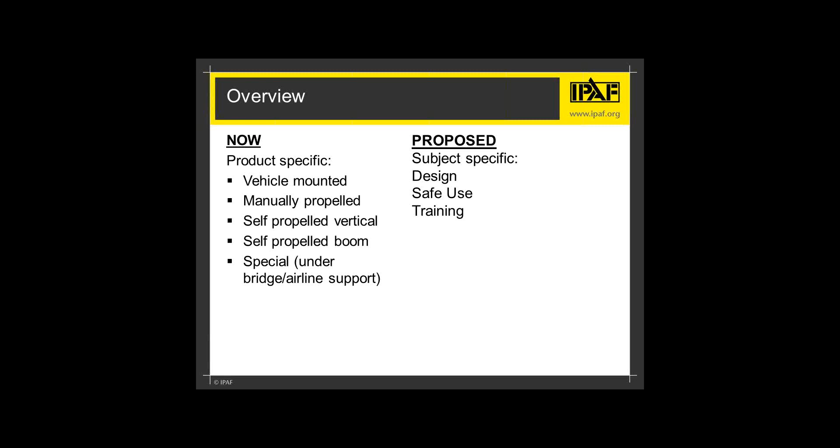The International Organization for Standardization, or ISO, is an independent, non-governmental membership organization and the world's largest developer of voluntary international standards. Members of the national standard bodies, such as ANSI and CSA, are part of 163 member countries around the world who participate in the development of the standards.

International standards make things work. They give world-class specifications for products, services, systems, and ensure that the quality and safety and efficiency of those products are in place. They're instrumental in facilitating quality. For businesses, they're strategic tools that reduce costs by minimizing waste and errors and increase productivity. They help companies to access new markets, level the playing field for developing countries, and facilitate free and fair global trade.

It's important to know that both ANSI and CSA are part of the development of ISO standards and are the voting member for their countries. Each country gets one vote. So while ANSI and CSA are part of the ISO standard development, there are different needs or focuses in different countries and the potential difference of opinions on what is finally approved. So as a result, the full adoption of the ISO standards is not common, as there's a need to modify or change the standards to meet the individual country requirements.

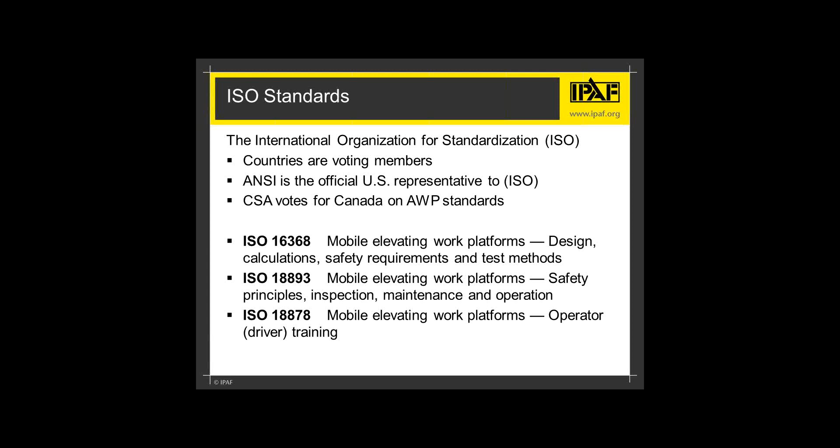The proposed standards being developed will follow the ISO structure with design, safe use, and training, and will cover all types of aerial work platforms. The same standard structure will be used by CSA in the development of new mast climbing work platform standards and the development of new proposed standards for transport platforms. So in CSA in Canada, you'll have a design, safe use, and training standard for aerials, mast climbers, and transport platforms.

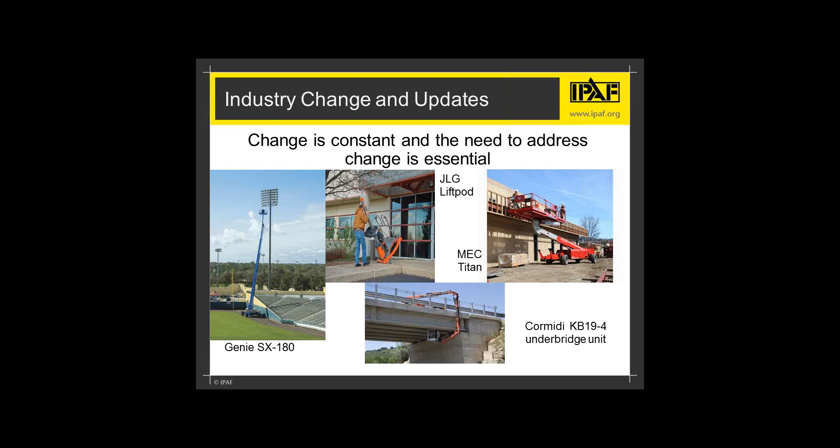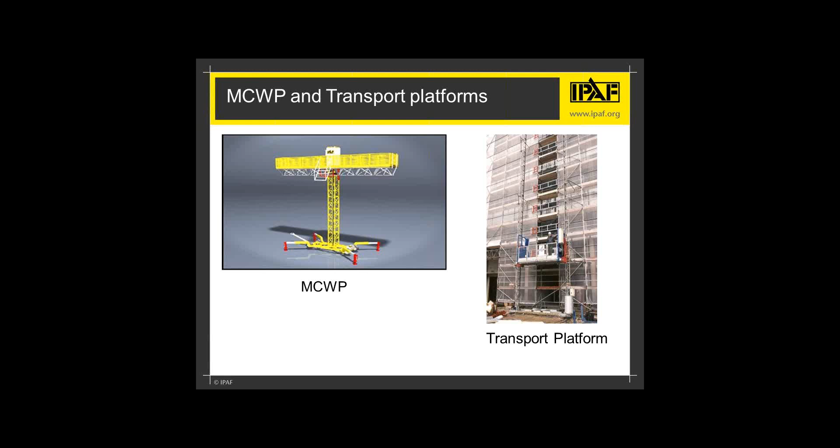When new products are developed, the industry is capable of developing standards long before regulatory bodies such as OSHA can address industry needs. So while regulations like OSHA are law, they do not change timely or keep pace with industry change. Mast climbers have been in the U.S. market since the mid-1980s, but they are still not addressed either in U.S. or in Canadian regulations. The new transport platforms are the same way, and trying to apply current regulations is truly not effective. Industry standards lead the way, and standards are the tool to assist all industry stakeholders in meeting their responsibilities and ensuring safe and effective use.

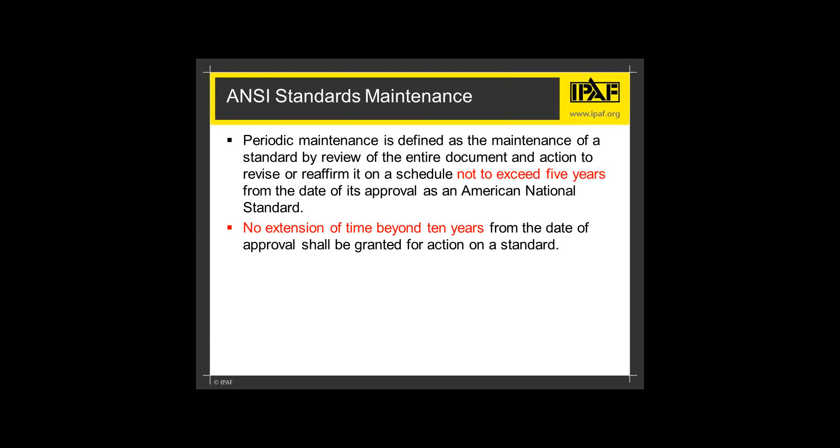So again, why are we doing this change? Well, change is constant, so there's a natural need to review and update our standards. Specifically with ANSI, they have defined very specific guidelines on how often approved standards must be maintained. Recently, some A92 standards were reaffirmed after 5 years from the initial publication, A92.3, .5, and .6, meaning they're reissued without any change. So there's a requirement that they must be reviewed every 5 years and not extend beyond 10 years before any changes are made. So it's a mandate in development of standards and maintenance.

So today we're talking about what's going on, what changes are being made. Under development today, this is a list of the A92 and CSA B354 standards under development. And today I'm going to focus primarily on the AWP standards and proposed language already released by the CSA B354 standards that were released for public comment. I need to restate that even the CSA standards being discussed today are not final. They are still out there with public comments that need to have final review by the main committee before they're ready for any level of final approval.

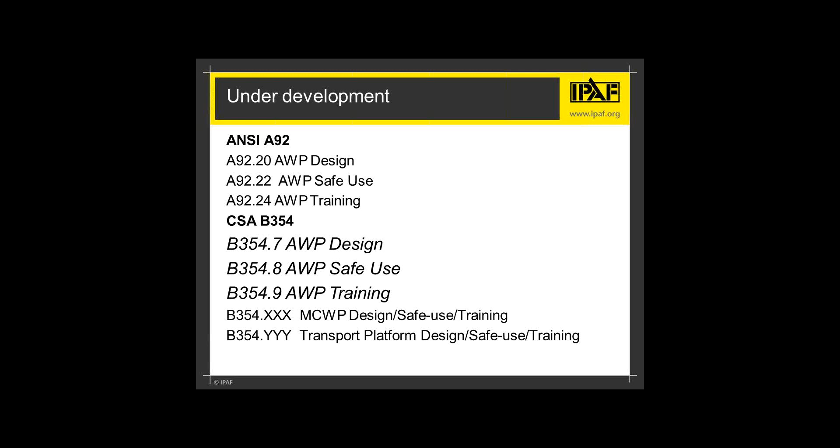Starting with the design standard, B354 standards. Both ANSI A92 and B354 main committees have agreed to use the ISO standards as the basis for these new standards for all aerial work platforms, so there's consistency on how we manufacture them, how we train on them, and how we use them safely.

There are 3 standards that will address it: design, safe use, and training for all aerial work platforms. And while it is the intent of ISO standards, both the U.S. and Canada will still have separate standards covering vehicle mounted. This may change in the future, but this product class will not be included in the new standards.

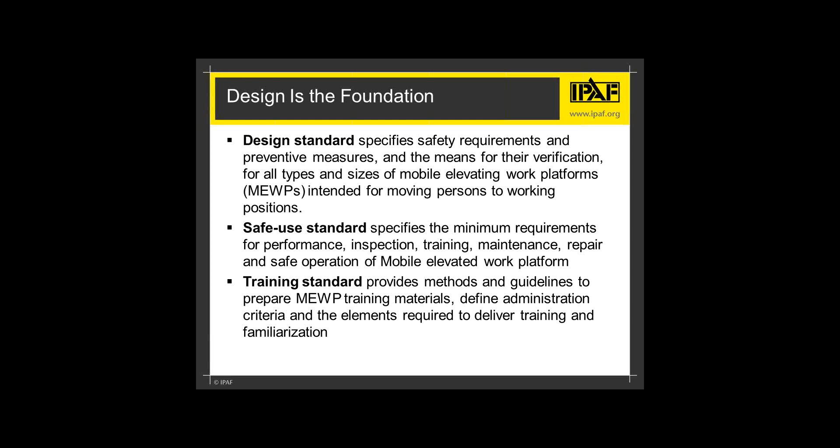The design standard actually leads the way for all of our standards, with both safe use and training addressing the needs defined by the standards. So you design the product, and then you define how you safely use them, and then how you train on how to use them safely. So the design standard is really the foundation.

The new design standards will provide more detailed requirements. There will be many more calculations required by the standard than before. As most manufacturers produce products for many countries, the adoption of the language in the ISO standards will not be new. They'll likely be producing equipment that follows most of the things that are being proposed in some part of the world. But there are some changes that they will have to make, some changes that may provide more flexibility in design for new products and, in the end, impact users.

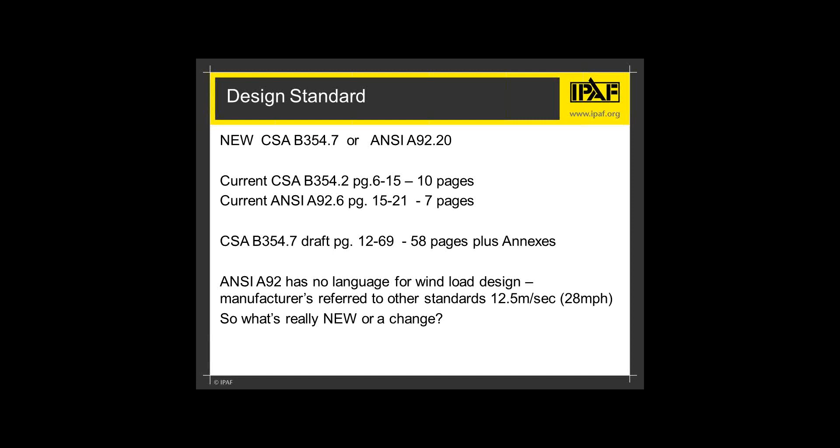So the question that I'm sure all of you want to hear about today is, what are those changes and how are they going to affect me? So again, looking at this slide, you can see that we're going from 7 pages, 10 pages, up to 58 pages plus annexes. So you know that there is more language that's in there. How is it going to impact me?

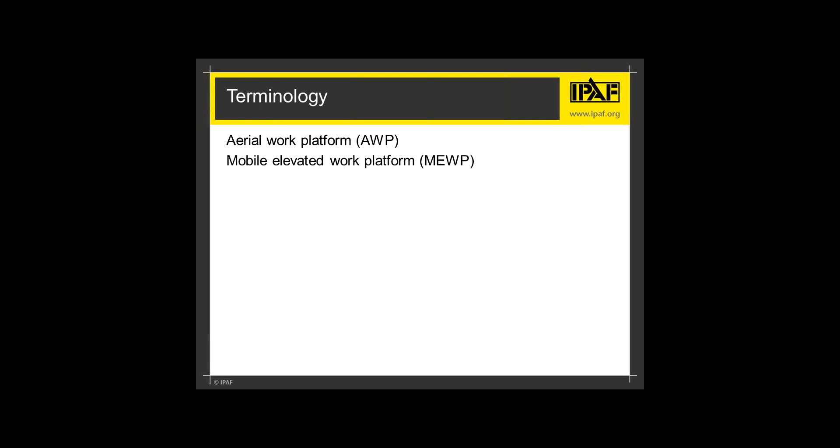Well, the first subtle change, and maybe insignificant to most, the standards will introduce by their title and referenced throughout the standard the internationally termed Mobile Elevated Work Platform with the acronym MEWP, which everyone pronounces MEWP. Having standardized terminology is important in documentation and communication. Begin to look for this in incoming communications: Mobile Elevated Work Platforms and the term MEWP.

Beyond that, a more significant change is the definition of the different types or groups of MEWPs. Again, get used to that term, Mobile Elevated Work Platforms, what you normally call AWPs today. Today's standards do not use the term scissor lift, as these pictures will hopefully explain why not. All are covered by today's self-propelled elevating work platform standard, either A92.6 or CSA B354.2. Many people may want to use the term scissor lift, but it's never used in any of our current standards.

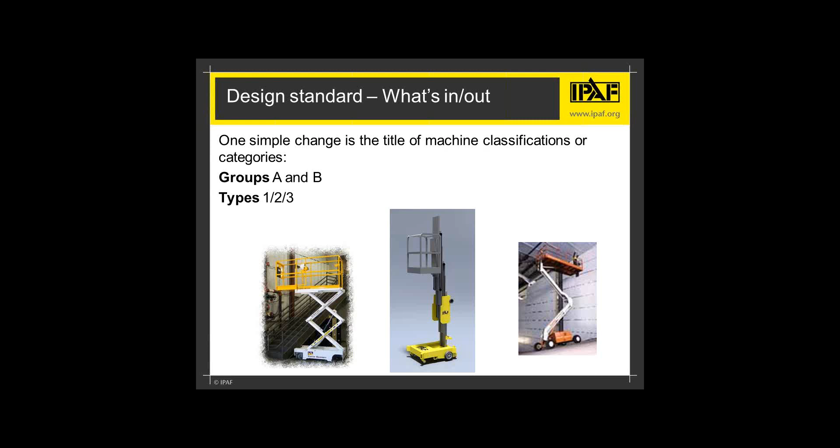So as we move away from product-specific standards, such as A92.6 or CSA B354.2, how are we going to classify the different types of MEWPs? There's that term again. How are we going to differentiate these different types of classifications as we move forward? And it was agreed by both ANSI and CSA to adopt the international definitions of MEWPs, groups A and B, types 1, 2, and 3. Well, groups A and B, and again, these are definitions.

Group A is any aerial work platform where the platform does not extend beyond the center of the work platform area and is always inside the tipping lines. And Group B, simply put, is any MEWP that's not in Group A. As you get used to these, you'll end up looking at these and saying, Group B are boom-type lifts, and Group A is anything that's not a boom. So that's where the platform will extend beyond the center of the platform area or outside the tipping zone of the chassis.

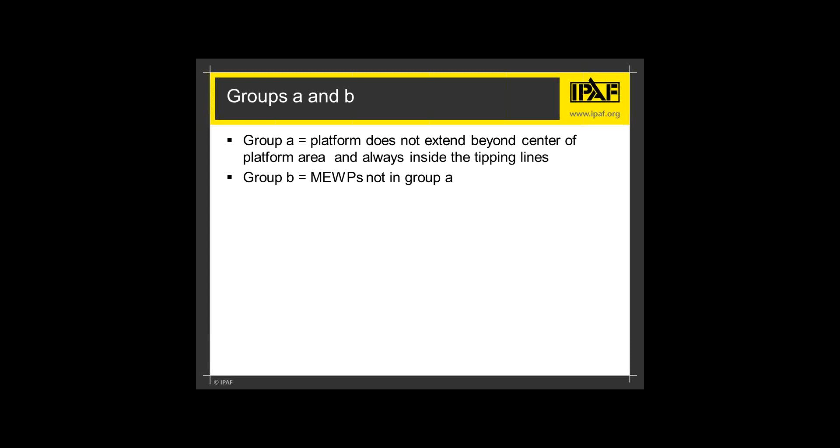So more specifically looking at these, Type 1 machines generally require outriggers to be in place prior to elevation. They're not drivable, or at least not drivable when the platform is going to be elevated. So Group A, again, is platforms that do not extend beyond the center point of the area and are always inside the tipping lines. Group B, MEWPs not in Group A.

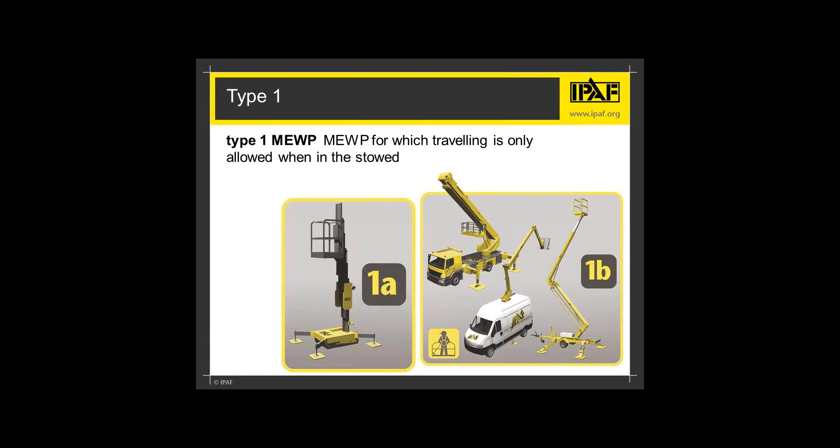So here you're looking at it, we have Type 1, which is in Group A, and Type 1, which is in Group B. So you can see the Group B are boom-type lifts, Group A are vertical-type lifts, and the Type 1 are machines that are not going to be drivable when the platform goes in the air.

Type 3 are MEWPs for which traveling with the work platform in the elevated position is controlled from the point of work platform relating to traveling. So here, when you're looking at the self-propelled machines, they are really what's going to be a type 3. And again, when you're looking at group A, vertical lifts, group B, boom type lifts.

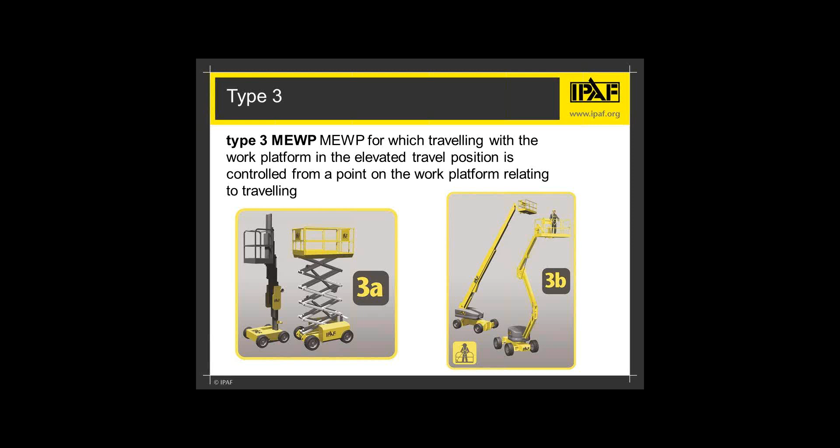So these new nomenclature or definitions that we'll be using are things that you're going to have to become accustomed to, because we're not calling them by standards boom lifts, scissor lifts, and we haven't done that in the past. So now we're coming up with, again, standardized terminology and definitions to be used in all countries.

Further changes within the design standard is a shift to more calculations. Let me start with the fact that I'm not a manufacturer or design engineer, but I am a sitting member on the design standard committee, and I understand this change to be significant enough to discuss. You can clearly see through all the additional pages that are going to be issued in the new design standard that there are changes. And it really comes to be predominantly that there are much more detailed calculations to account for most of the additional requirements.

This change in design based on testing with safety factors, such as the rated load plus 1.333, versus design based on more calculations, removes that safety factor and replaces it with calculations for all the variables. And they're compounded. So now there's a specific calculation for wind load, for stability, and all of these have very detailed calculations.

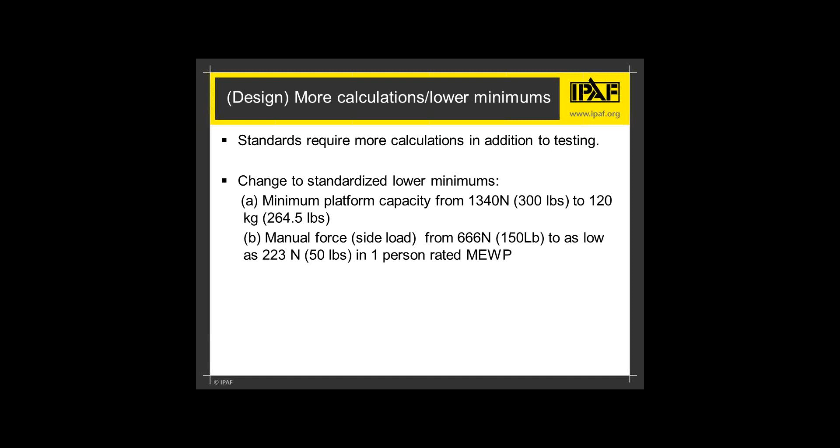Another change that's out there, it may be terminology differences, but it really is based on our standards. If today a user was asked, what is the rated slope on the lift that I'm using, most likely they'll answer incorrectly. It actually is 0, the rated slope on most aerials out in the marketplace today. When you look at the decal plate on most aerial work platforms and look at the rated slope, it'll say that it's 0. And most people think that it's greater than that.

And that's because the design standards today require that the slope warning device is activated at 5 degrees over the rated slope. So think about it in those terms: if we had a rated slope of 5 degrees and then the warning went off after that, you end up having a stability issue. So based on what the standards currently require, we end up having a rated slope of 0. And for most people using this, that probably doesn't make a lot of sense.

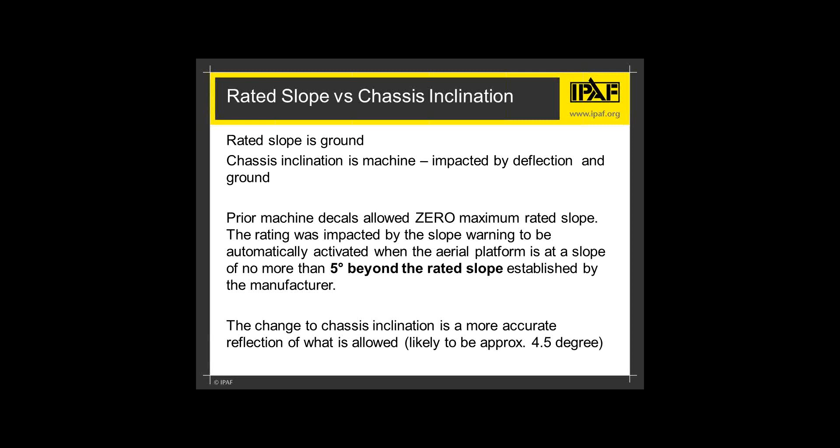So really we're making a change to chassis inclination, which is actually even more accurate, because chassis inclination takes into effect the rated slope of the ground that you can ride on, plus the deflection of the machine. So if you take a boom type lift specifically and rotate it off to the side, just the tires and movement that you have on there will impact it. So most likely you're going to find that we're going to go from 5 degrees to 4.5 degrees.

Further on in the standards, and this really goes across all 3 of the new standards, users must ensure that the MEWP has an annual inspection prior to use. Now, how do they know it if they don't own the machine and haven't performed the inspection themselves? Like an inspection decal on every motor vehicle, an annual inspection decal can provide the assurance that a qualified person performed the task. While today some rental companies may be doing this, not all do, and not all owned machines are marked. This new language defines a standard for the decal design with the required information on it, the size of it, and the general location where it will be placed.

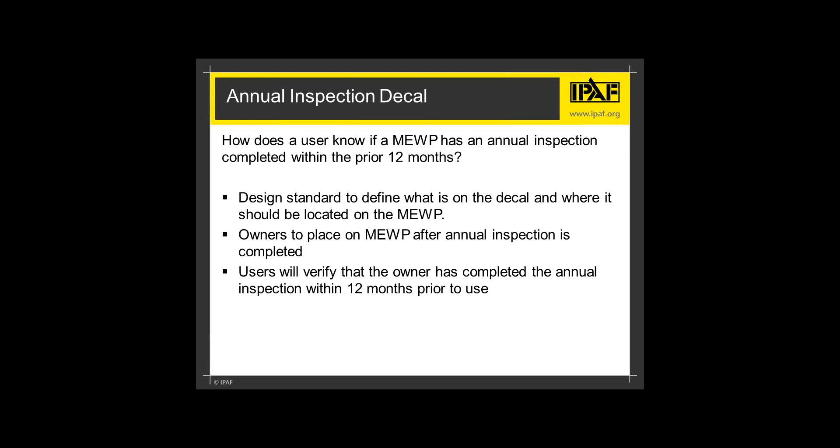So the design standard will create a sample decal that's to be used. The safe use standard will define the requirement to perform the inspections and place the decal on the MEWP. And the training standard will define the responsibility of users and operators to verify that the MEWP's annual inspection is up to date by verifying the decal. So we now have a very systemic approach to how that's done.

Probably one of the more drastic changes that most people will perceive in the new design standard is the implementation of load sensing that will be introduced on all MEWPs. Again, mobile elevated work platforms, not AWPs, MEWPs. It is a safety device that is currently on MEWPs in other countries. It prevents operational control until an overload condition is corrected.

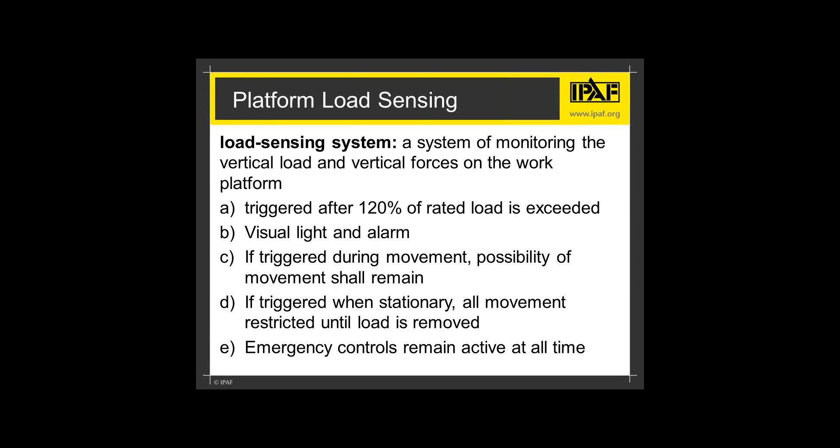So it's really not new to the industry. It's been available for many, many years in the marketplace. It's been on most aerials in Europe for several years, and it's really an added safety feature on the machines. It requires additional training and maintenance, and all of those parts need to be implemented throughout the design, safe use, and training standards. So a little bit more on load sensing as a value proposition. Well, what is it? The fundamental reason for this is a safety device to prevent overloading. And the initial complaint will be heard from those who overload the platform.

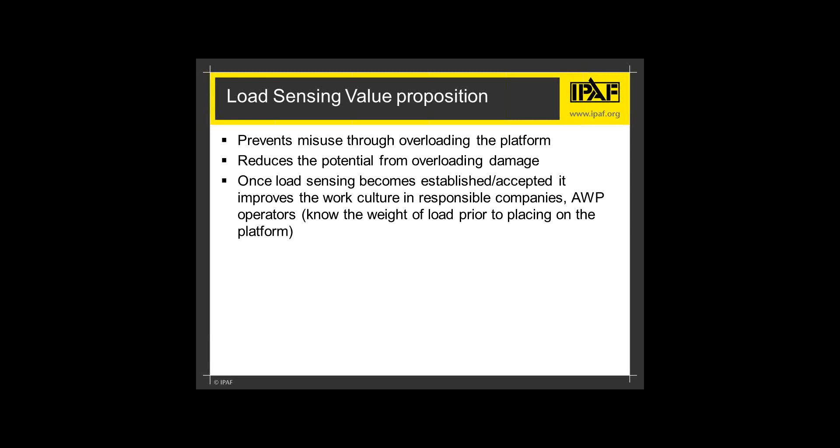So if we look at some historical information and feedback on the implementation of load sensing, look at the first one. Load sensing restricts or limits the use of the machine, especially booms or smaller capacity platforms, and this will result in dissatisfied users. Oh, I did this before, and now I can't do it anymore. Well, that means you were overloading the platform before and you want to continue doing it, because the only thing load sensing is doing is saying, here's the rated capacity and you can't exceed this.

Users request older machines without load sensing so they can continue to do what they've done before, overloading the machine and exceeding the load capacity. So again, this is some of the feedback that we've gotten historically. Customers can adjust or tamper with the less sophisticated load sensing devices. Well, obviously, this is misuse. No safety device should ever be touched. It will increase the risk of injury.

And typically, this is something that steel erectors or people who are putting heavier loads on the machine will have a tendency to do. Again, not anything you should adjust on any machine at any time. Incorrect securing during transport.

Tying down the basket of a boom can really impact that; you can end up having this load be imposed on this machine during transport. And if it's set off, then you can't move the machine when it's out there. Again, the loads need to be secured properly. The manufacturer will tell you how to secure the aerial work platforms during transport. So all these things are going to be implementation items that you need to be aware of.

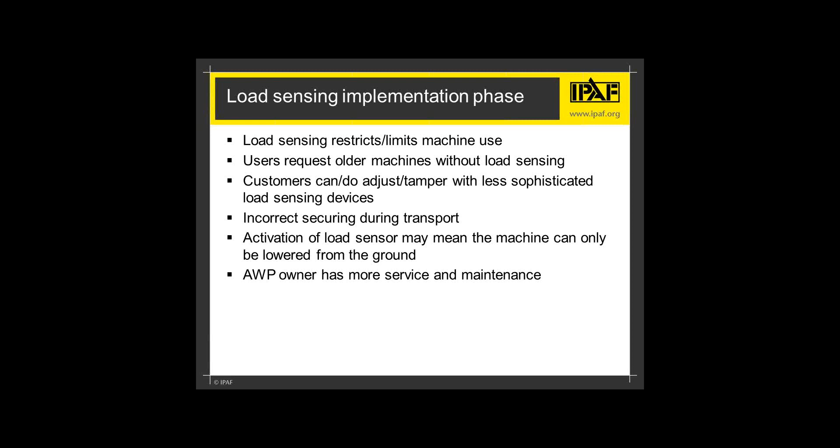But again, the fundamental process of looking at this is load sensing is a safety device, and really it's there to protect the users of the equipment, the machine itself. So that will be one of the changes that you'll see, and again, it's language that's proposed in both A92 and B354.

In the safe use standards, we have some changes that are coming about. The most current language only allows variation in use with the prior written permission of manufacturers. That's generally terminology that goes in most places throughout the standard. And users have complained that they have performed some tasks safely, maybe even more safely than other available options, but they can't get manufacturers' approval in the timeline that they need. Additionally, some manufacturers are no longer in business.

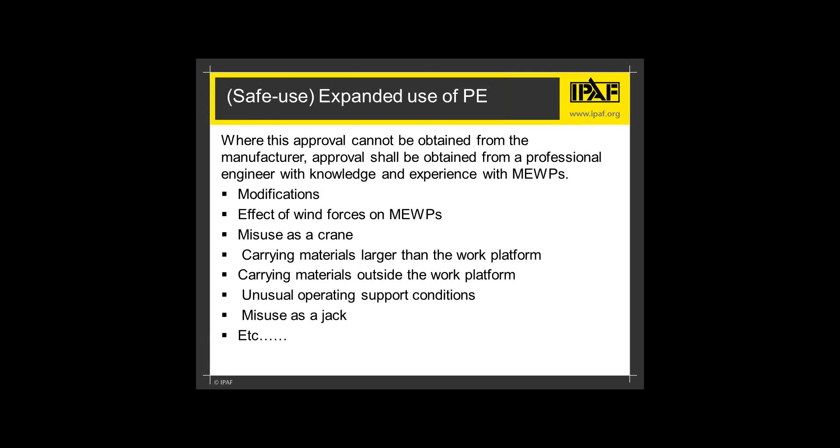So while the intent is to continue to rely upon manufacturers as the primary authority, the standards have provided an alternative option to the use of professional engineers as qualified persons for approved option uses on MEWPs. So again, this is kind of a change in what the standards have defined and provides more flexibility in the field.

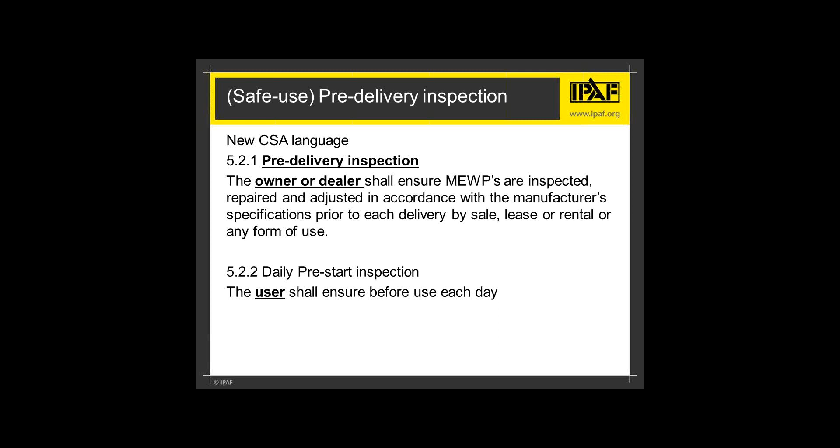Another change, and again, this is based on the CSA language being issued and compared to both CSA and ANSI. The pre-delivery was not specifically stated as a requirement in prior CSA standards. Further, note that the CSA standards are also including added responsibilities under pre-delivery inspections for owners and dealers, and under daily pre-start inspection, the user. Owners and dealers were not specifically named in the prior standards, and in order to be very specific in safe use, these are the people who have to do these tests, and they're specifically spelled out now in the standards, bringing about that harmonized language throughout all of the country standards.

Another item that will be introduced in the safe use standards, while not actually new in Canada or some other countries, but in the U.S. under the A92 standards, will be the requirement for structural inspections 10 years after the date of manufacture and every 5 years thereafter to verify the structural integrity of critical components of the aerial work platform and its stability as originally manufactured in accordance with standards that were in effect at the time the machine was manufactured. So this is a new requirement that's out there.

Machines have a certain duration or life, and it really has been defined by the manufacturers that at a 10-year point, this structural testing should be in place, and this will be introduced through both CSA, which is, as I said, for the most part already in place, and being proposed as new language for the ANSI standards. Additionally, it's worth mentioning that under the implementation of the structural testing, the structural inspections shall be carried out under the direction of a professional engineer. So it's not something that the rental yard or a contractor owner is just going to have one of their people do.

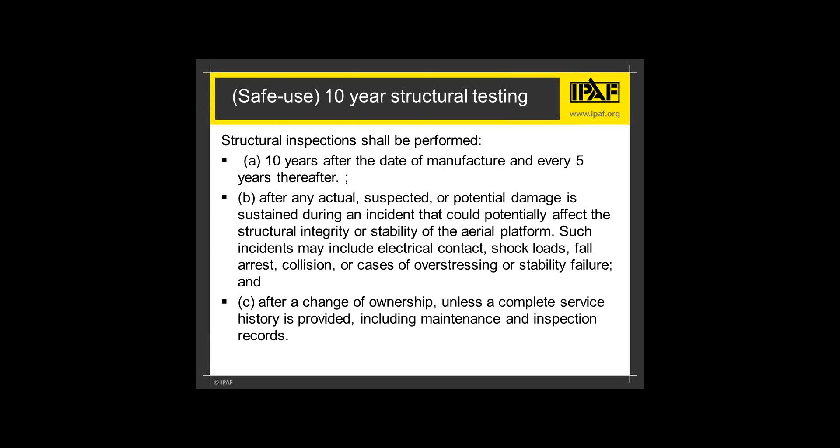Additional language is the implementation of the requirement for qualified persons to perform tasks. It is not new in both regulations and standards, but the specific language for training is general with no specifics. So while we have this language in here that maintenance personnel training is going to be required, we have not introduced a training standard for that, but it really does go beyond just saying you need to be a qualified person. So while it may have been assumed in the past that they needed to be trained, this new language specifically in CSA needs to be paid attention to.

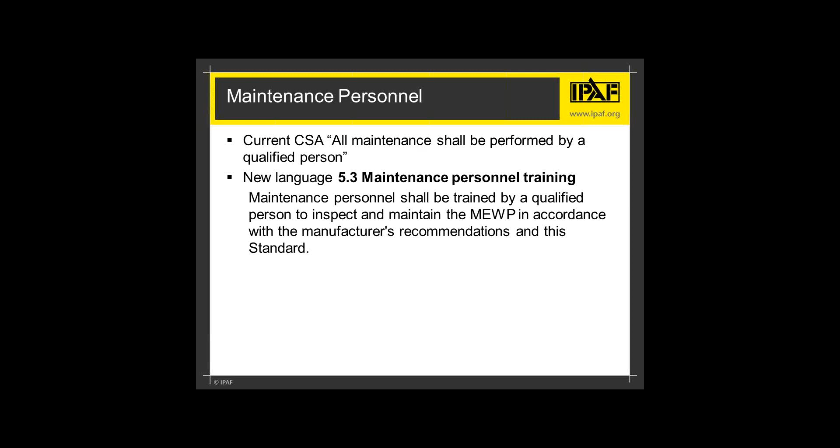Additionally, in the safe use standard is language relating to safety bulletins. This is new CSA language addressing safety bulletins as a topic and is generally covered by the current ANSI standards. But the assigning of specific responsibilities to MEWP owners to register with the manufacturer is new language, and it reaches all owners, including those who purchase used equipment from any source, to ensure that they are known owners and receive necessary communications from the manufacturer. We can't say go do the safety bulletins and the manufacturers not know who the owners are to get those bulletins to them.

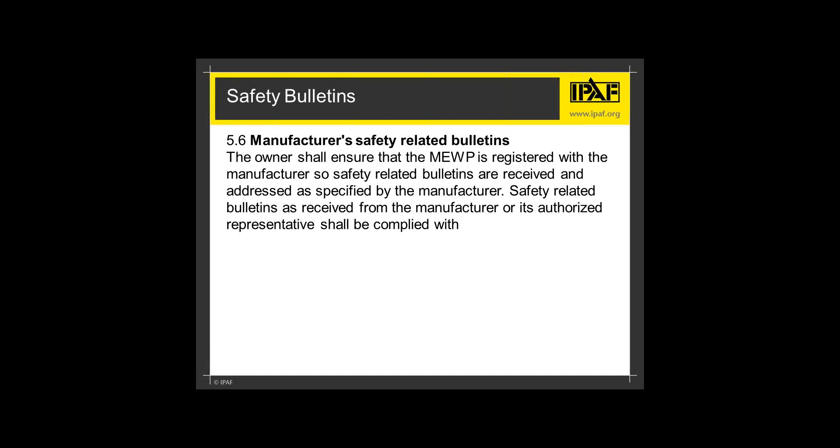Another broad introduction is the involvement or development of risk assessments. So safe use of a MEWP is required, and again I'm using the term MEWP, which is an aerial work platform, mobile elevated work platform. Safe use of a MEWP requires a hazard assessment of the task to be performed and the site conditions where it's to be used. So while the design standards make a perfectly sound piece of equipment for its intended use, you need to use it appropriately in the right environment for safety to be in place. So specifically, we're looking at providing multiple steps of developing risk assessments.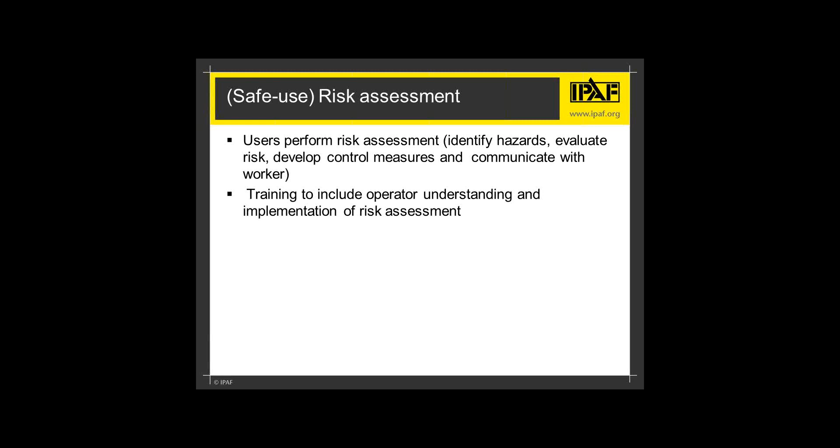So there'll be a section on identifying the task to be undertaken, selection of the appropriate aerial work platform, a MEWP, for its use, assessment of the risk associated with the task, identifying control measures for those associated risks, identifying safe work procedures, and lastly, a rescue from height plan, because if someone needs to be rescued, having a plan for that is something that needs to be done before the incident occurs. So risk assessments in safe use now have a very defined place and have been well documented in the new standards.

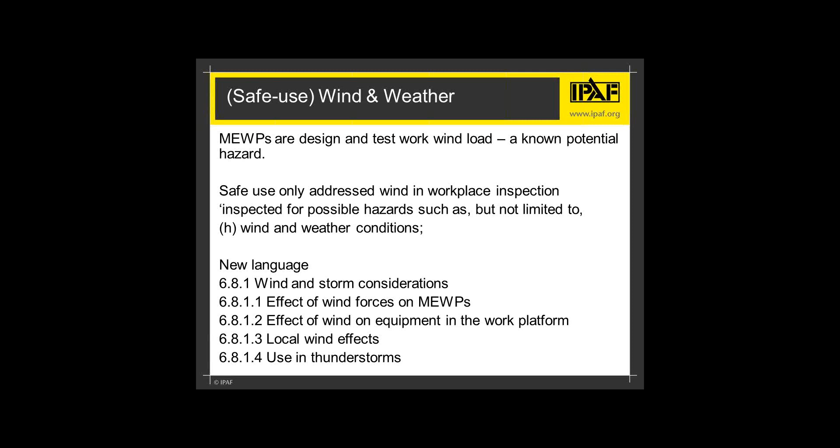Safe use and the associated training for operators must address known hazards, and this new language will raise the depth and understanding of wind and weather. Currently, it has been addressed only in the workplace inspection, and it says, look for wind and weather. So to provide a broader level of understanding of what those risks and hazards are, new language has been introduced, as you can see: wind and storm considerations, effect of wind forces on the MEWP, effect of wind on equipment in the work platform, so if you have a plate of glass, local wind effects, and use in thunderstorms. So the safe use standard is providing more guidance and more detail for safe use.

In that regard, traveling, meaning driving a mobile elevated work platform, has more information as well. MEWP traveling, fall protection requirements, tasks to be done before moving, when moving, traveling to or from or within the work area, while working at height, and issues like distraction. All of these will be, again, providing more guidance so that if we're going to use these things safely, these items all need to be addressed.

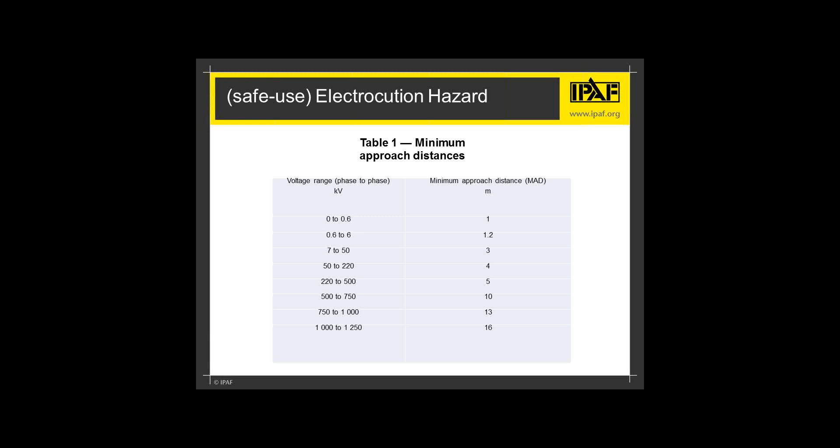Another, I'm going to say, new entry into safe use is on the topic of vacating or entering a MEWP at height. Aerial work platforms are not specifically designed to transfer personnel from one level to another or for leaving the work platform at height. Consideration shall be given to assessing other options to accomplish this task. That being said, the industry has said, look, we know that it's not intended for that, but there are many times that it is the most appropriate way for us to get our people to a point at a higher elevation. So the industry has acknowledged that there are ways that you can do it safely, and rather than the prior language that you can't do it unless you have the specific written prior permission of the manufacturer with a detailed description of how that takes place, guidance will be provided in the standards on how to do this.

Again, we're still in the position of saying that you should find alternative means. If there's a stairway nearby, we don't want to just go and take a scissor lift there because it's convenient. Where permanent applications should be used, they should be used. But where it's appropriate, where it's safer in the safe use of these products, we're providing some guidance on opening the door and being able to do that.

In the training standard, it is the user's obligation to make sure that the training is provided in a manner that the trainee can understand. So in cases where we end up having non-English speaking operators, it's the user's obligation to provide a translator when required during training to ensure that non-English speaking workers understand the training requirements of the standard.

Further, when that training is established, you've got to keep in mind that it is still the user's obligation to ensure that the operator can read or understand the manual, safety decals and instructions on all MEWPs that he will use in the future.

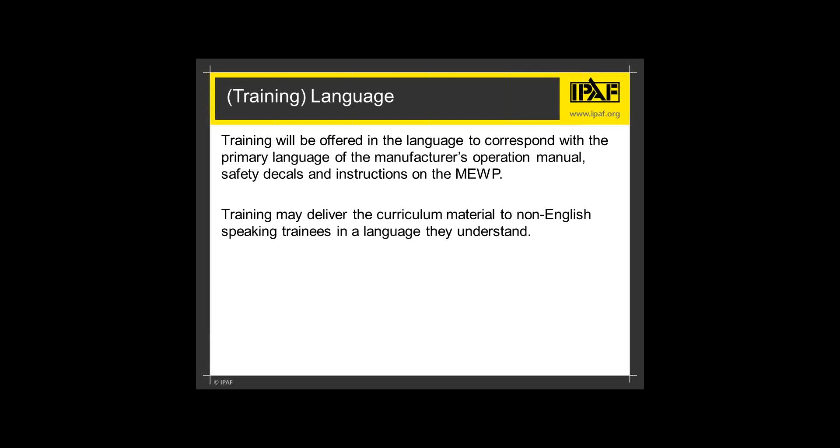So we needed to open the door about language of training and how that's applied so that we can provide tools, so we can provide courses that are in other languages, but we need to still keep in mind that the operations manual and the decals on the machines that they may be using are not going to be in other than English or whatever language is on the product in the marketplace that the training will be delivered.

You can see here that the operator training has to include everything that's in the safe use standard. The inclusion of all topics and issues in the safe use standard must be included in operator training. This should clearly reinforce that operator training is not familiarization and will bring about more standardization of what is provided in operator training courses as defined by these industry standards.

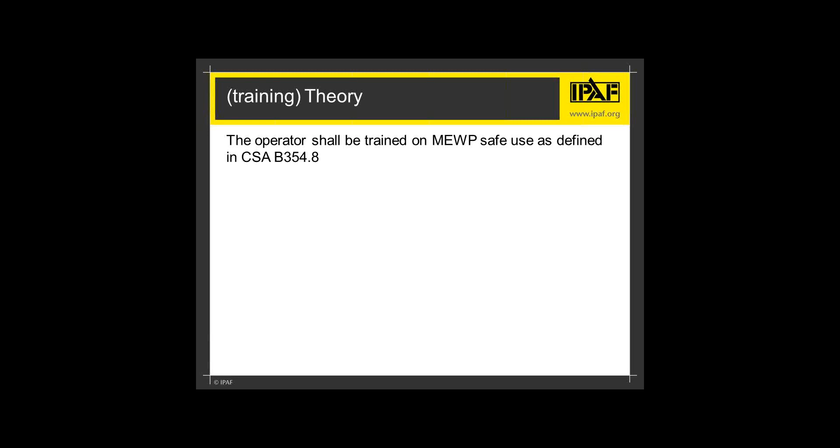The training standard has also introduced examiners in the needed expansion, as we're bringing about the introduction of approved distance or online learning to be allowed. And if that's going to be delivered for the theory training, instructors will be doing the delivery of training, but where you have online types of deliverables, the introduction of examiners to test them was also required.

So again, the standards now are addressing the online training that's being introduced into the marketplace as something that's acceptable in the confines for which it is acceptable, and examiners to be attached to that so that they can do testing rather than having a trainer be required to do the testing, whereas trainers can deliver training.

Another item that is being introduced is Occupant Knowledge. This new language introduces the requirement for all aerial work platform MEWP occupants to be provided with some basic knowledge to safely work from an elevated work platform, and makes it the responsibility of the MEWP operator to ensure that the occupants of the machine that they're authorized to operate are prepared to work safely from the mobile elevated work platform.